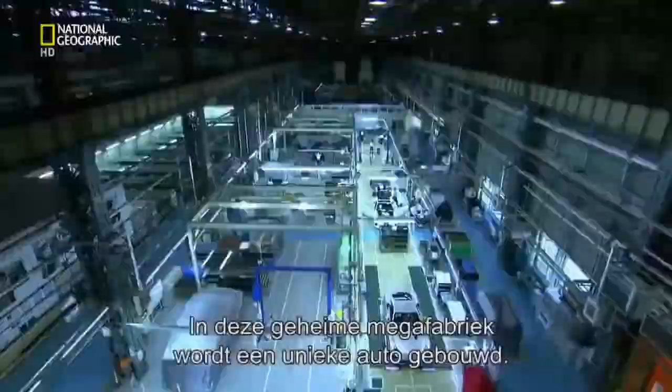Inside this top-secret mega factory, a car like no other is taking shape. Craftsmen hand-build what they consider an automotive work of art.

Money is no object. This machine must redefine a billion-dollar brand. Failure is not an option.

Japanese marque Lexus sells itself on luxury, marketing its cars as elegant, quiet, high-tech, and efficient. Now, a different kind of car wears the Lexus badge: the LFA.

Aggressive, loud, agile, with the highest revving V10 engine in a production car, capable of 325 kilometers per hour. A car like nothing Lexus has ever produced before.

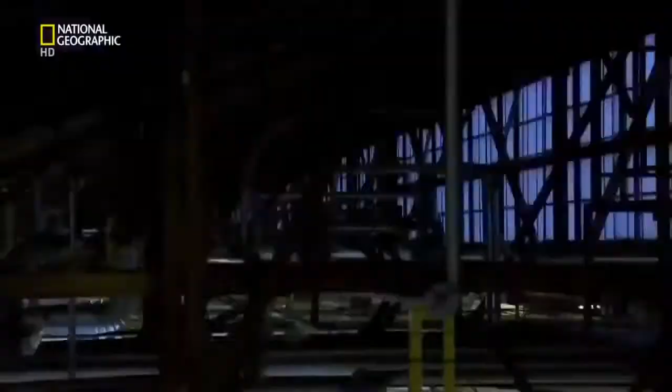Chief Engineer Tanahashi is stepping into the unknown. He must build a car, a team, and a factory from scratch. Basically, we proceeded at my discretion, and where there weren't any rails, I laid them down.

Finding a factory in Japan isn't hard when you're part of the country's largest company. Toyota is so big, they even have their own city, Toyota City.

Of the company's 15 Japanese factories, 10 are found in the city or close by. Among them, the Motomachi assembly plant.

The company transformed two unassuming blocks of this megafactory to create the LFA. They then scoured Toyota's 50,000-strong Japanese workforce to handpick just 175.

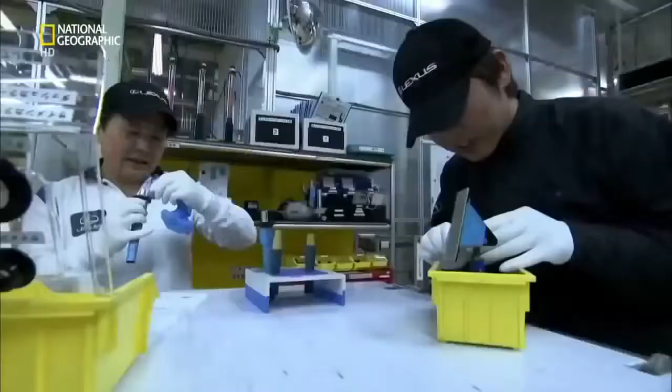All the associates here at the LFA Works feel they are artisans, not just operators. These artisans are known as takumi, Japanese for craftsmen, a status only conferred on the most highly trained, skilled workers.

Each and every associate at the LFA Works is seeking to achieve perfection, taking this challenge on with a sort of samurai spirit.

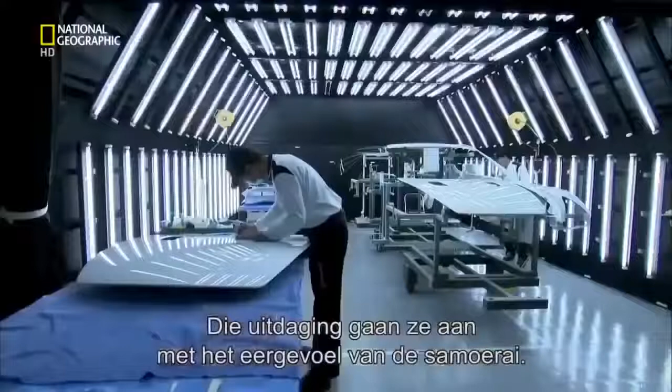Yamanaka Shigeru is manager of the LFA Works. His teamwork credentials come from another time-honored Japanese tradition: baseball.

Before this, I was working as manager of the Toyota Motor Corporation baseball team, which brought people together from lots of different backgrounds. It was because I could manage that organization that I've been made manager here.

To reach their goal, the tight-knit team utilizes sophisticated tools and materials to build the car. The most important of these is carbon fiber composite. Carbon is crucial to the car's performance.

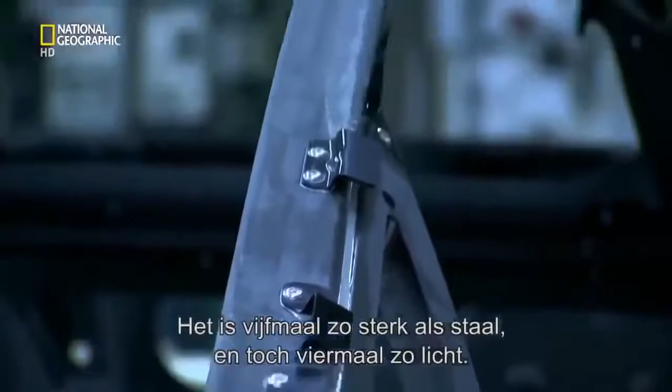It's a material five times the strength of steel, yet a quarter the weight. It's the construction material of choice for both Formula One racing cars and the aerospace industry.

The company even makes their own carbon fiber here on site. Up until now, no television cameras have ever been allowed inside this top-secret facility.

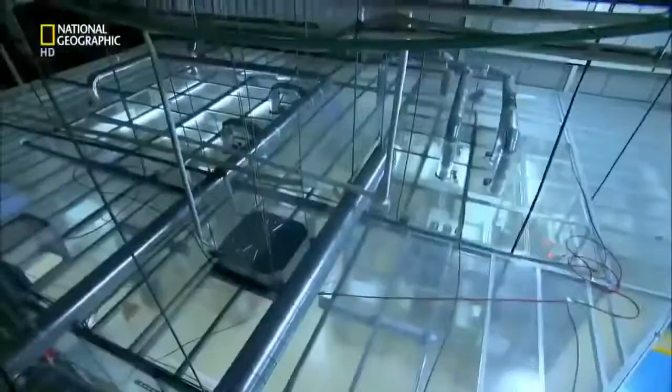First, simple strands of carbon fiber are woven into a pliable cloth using an automated weaving machine. This fabric is then transformed through heat, pressure, epoxy resin, and labor-intensive techniques into the car's core, known as the tub.

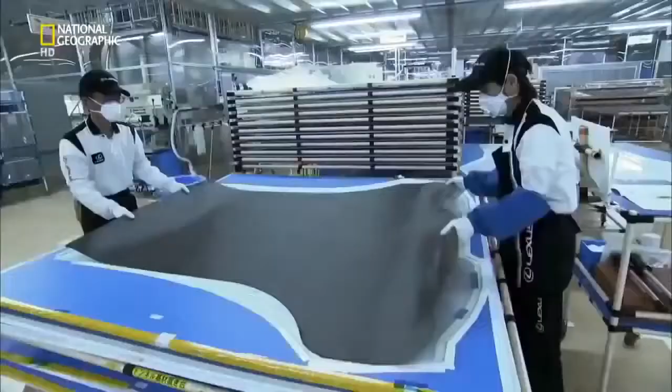The tub is pieced together like a 3D jigsaw. It starts with the construction of the floor. To make it, precisely cut carbon fiber cloth is lifted onto a mold.

Next, skilled Takumi smooth the supple fabric over the mold. This one is for the transmission tunnel that will house the drive shaft and exhaust.

In very complex areas like this, the fabric inevitably becomes frayed and not very neat. The associates work with these areas as if working with silk, taking great care every day. They also wear masks to avoid breathing in the hazardous fibers.

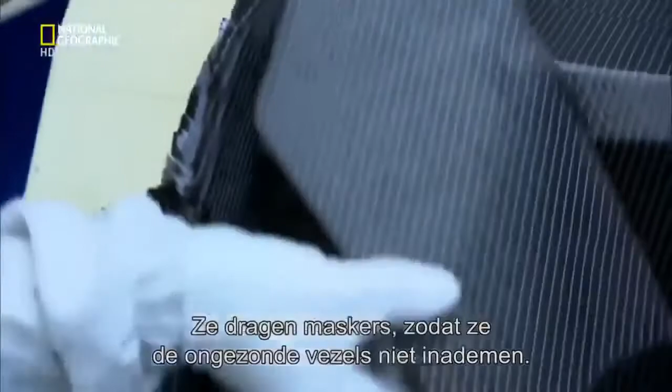In the beginning, the associates found it very difficult to work this material. It was much easier when they used an iron.

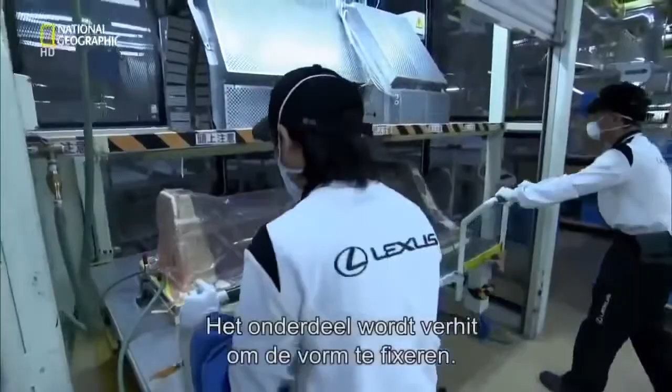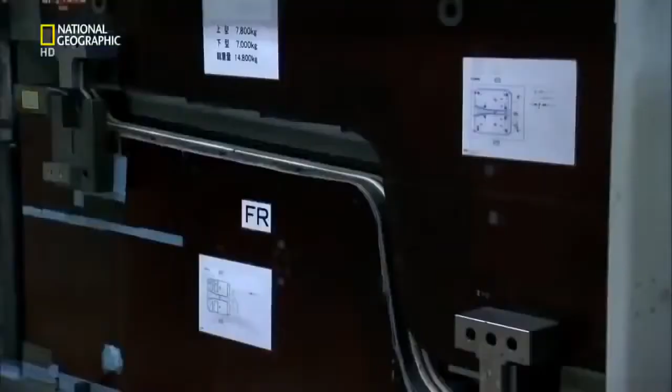A glue-like resin is pumped into the template, and the whole section is then baked for 8 hours at 130 degrees Celsius. Under this pressure and heat, the resin sets hard, binding the individual parts together to produce the car's floor panel.

Back in 2000, the concept of a world-beating supercar only exists in one man's head. At the company, I talked to just a small group of people at the top, not expecting anything, and they said, go ahead and try.

With permission to proceed, Tanahashi gathers a team of engineers around him, and they start to make the basic engineering decisions. In the beginning, we planned to make the body from aluminium.

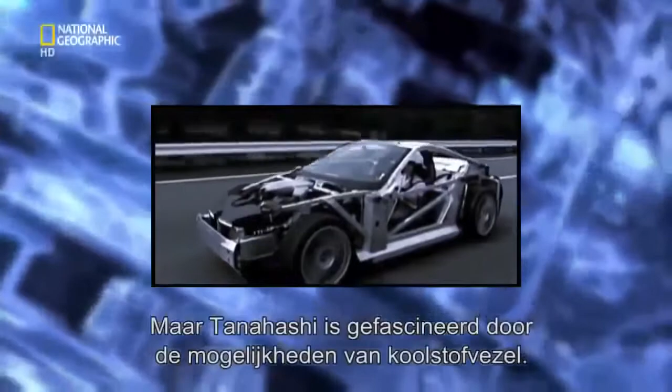But Tanahashi is fascinated with the possibilities offered by carbon. Developing a supercar, a super sports car, carbon fiber was a material I really wanted to try using, if at all possible. But this wonder material has its drawbacks. It's expensive, and the company has never used it to build any of their cars before.

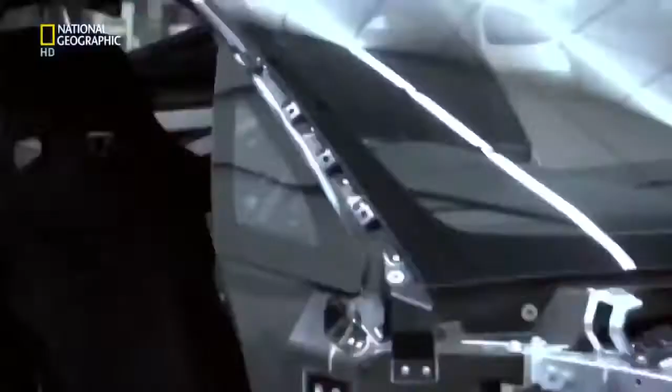Despite these significant challenges, Tanahashi gets his way. In 2005, my boss said, why not go for carbon? Slapping me on the shoulder. And I made the decision to go for carbon then.

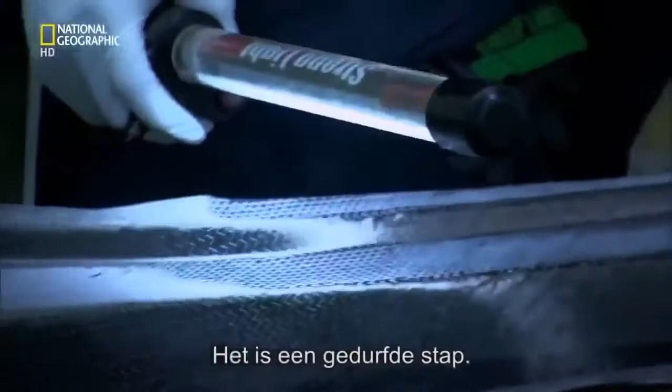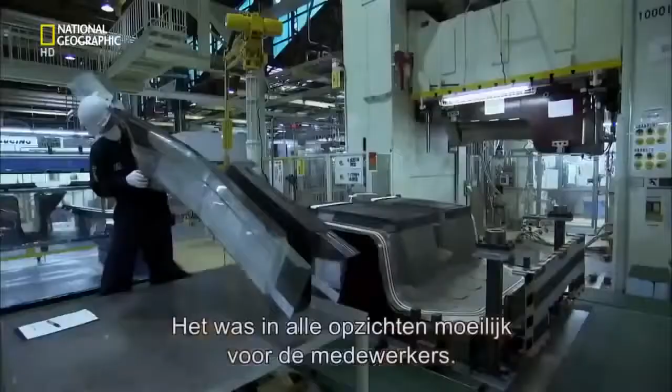It's a bold step. Everyone involved with this project must master a material they have no experience with at all. It was the first time the workers had touched carbon, and everything about it was difficult for the workers.

In the state-of-the-art carbon fiber facility, the Takumi are returning from lunch. They vacuum themselves down to remove any foreign particles before entering a highly confidential sealed room. Here, the majority of the tub's central frame is created using the most intricate techniques.

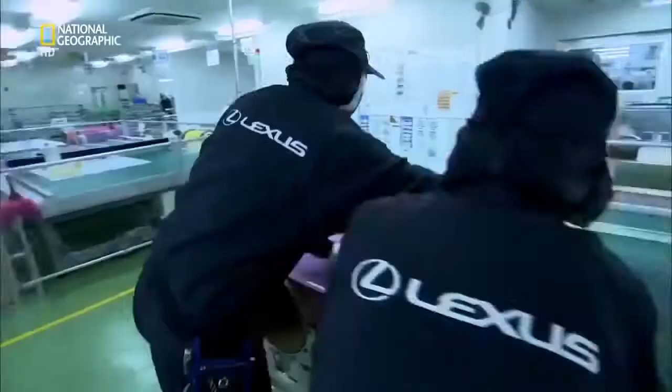In this process, an automated laser cuts out hundreds of individual shapes from carbon fiber cloth that's been pre-impregnated with a sticky resin. Next, Takumi layer the cutouts, up to 20 sheets deep, onto a mold. This one will make the right side panel.

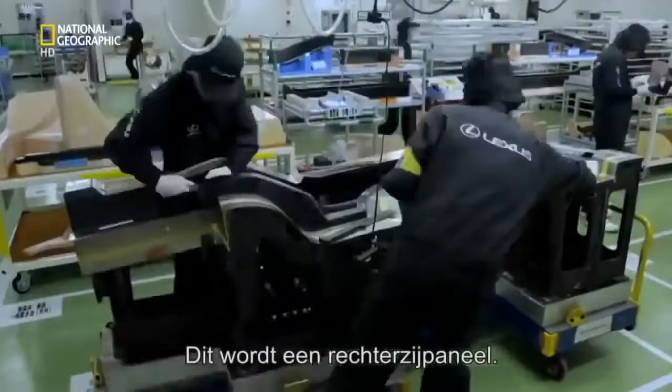The associate uses a dryer to raise the temperature of the laminate and half melts the resin as he applies it. The tacky cutouts stick to each other and any gaps are squeezed out using a vacuum bag that forces them together.

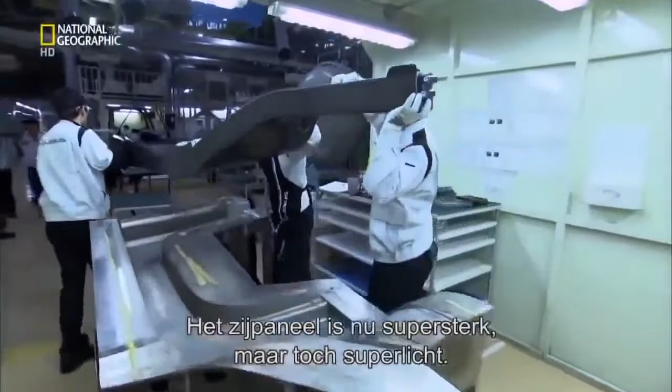The shrink-wrapped side panel is then wheeled across the works and loaded into a pressurized oven. Baking overnight at 150 degrees Celsius sets the resin, resulting in a side panel that's both ultra-strong and ultra-light. An aluminium equivalent would be twice as heavy.

Weight saving is the holy grail for all auto engineers. Less weight and more power leads to increased acceleration, and speed defines a supercar. The body of the LFA is 65% carbon fiber, helping it accelerate from 0 to 100 kilometers per hour in 3.7 seconds.

If made of aluminium, it will be 100 kilograms heavier, like having a sumo wrestler in the passenger seat. As it is, this car weighs just 1,400 kilograms all in.

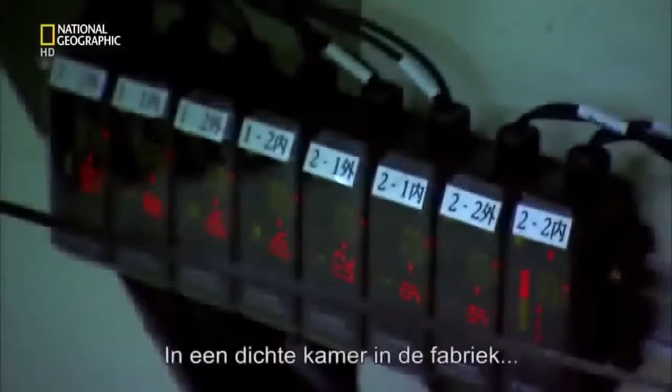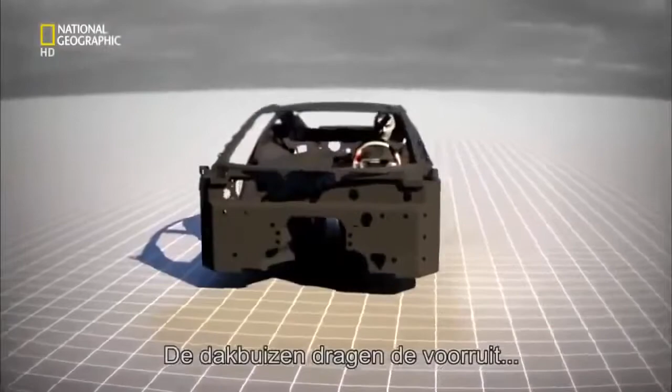Back at the factory, in a locked room, a bespoke machine creates two crucial parts to complete the tub's construction. The roof rails support the windscreen, as well as protecting the driver if the car rolls over.

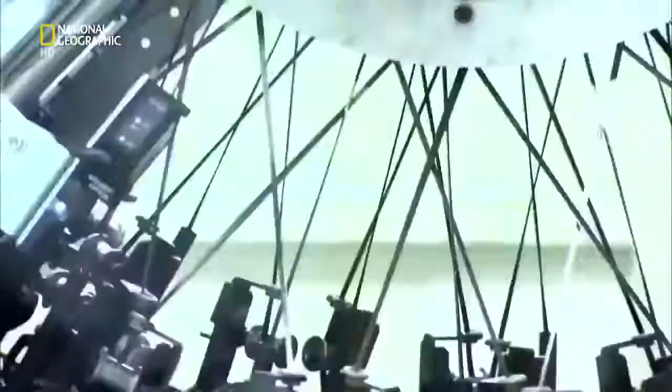This custom-built circular loom weaves the carbon rail in 3D. It uses lasers to control the feed of carbon fiber strands onto 144 bobbins. These knit the carbon around a top-secret automated template that's fed through the center of the loom. This is done twice over to cross-hatch the carbon weave, so giving the rail its strength.

The whole mechanism has its own control box, and for good reason. If something goes wrong, even a little thing, the shape gets distorted immediately.

The drivetrain comprises the transmission, torque tube, and last but not least, a 4.8-litre V10. The location of this engine is crucial to the car's entire concept. I wanted to build the car around the people in it. And for a supercar that puts people first, the optimum place for the engine is front mid.

This front mid location puts the engine between the driver and the car's front wheels. With the transmission placed at the rear, the driver is in the center and the car feels balanced to drive. The aim is to make the car's handling as good as possible.

But a front mid configuration dramatically restricts the space available for the engine. Tanahashi has a problem. You need an engine of a certain size with a certain degree of compactness, but you want a high-powered engine as well.

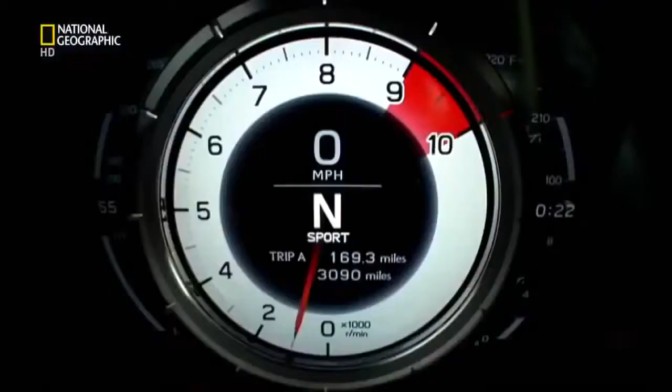Tanahashi needs a small engine to fit in the restricted engine space, but he also needs the power of a large engine because power equals speed.

And that isn't all. The high-pitched sound of Formula One makes you shiver, doesn't it? I really wanted to have that as part of the LFA.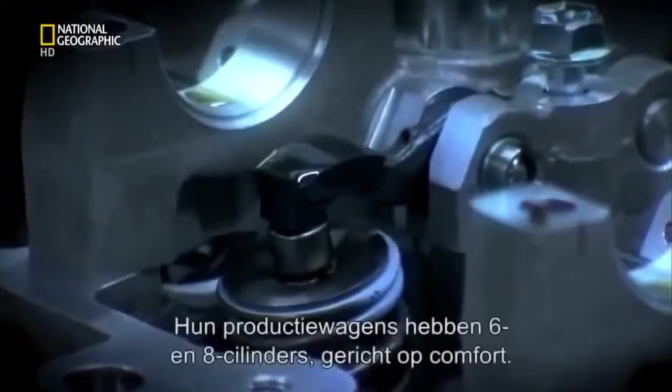Only a high-revving V10 engine supplies this combination of power and sound, but a traditional V10 is too big for his mid-front configuration. Lexus have made nothing like this before. Their production line cars use 6- and 8-cylinder engines engineered for a super quiet ride. This V10 will be the opposite.

Tanahashi turns to some old friends for help. We are a motorcycle manufacturer. We understand power alone is not enough in a vehicle. For a sports car, small and lightweight is critical.

For almost half a century, Yamaha have worked with Toyota to create high-powered, lightweight engines and cars. The legendary 2000 GT, star of the James Bond film You Only Live Twice, and Japan's first true sports car, was the first fruit of their collaboration.

Headed by Lexus engine guru Okamoto Takamitsu, the team sets itself an ambitious goal: to create a naturally aspirated V10 engine as compact as a traditional Lexus V8, with the weight of a V6.

I wanted to create something different to any other supercar engine.

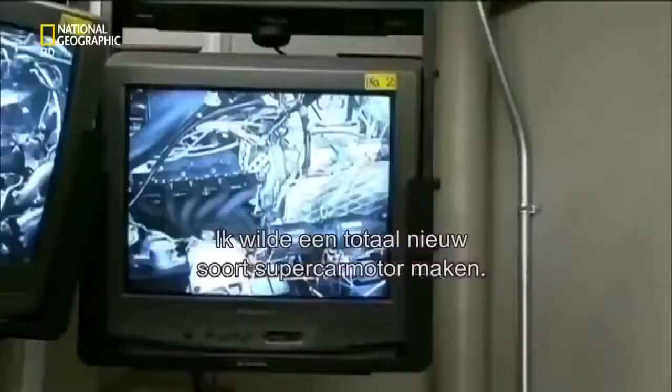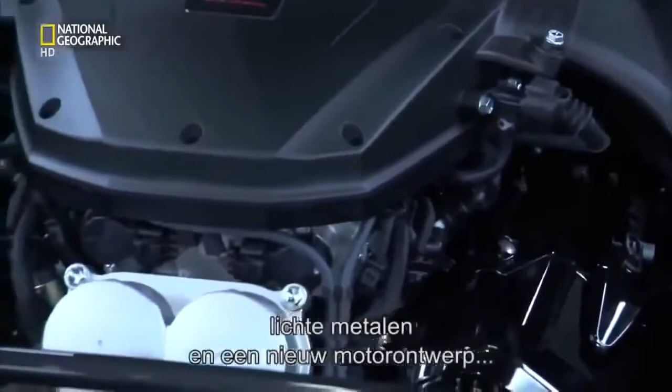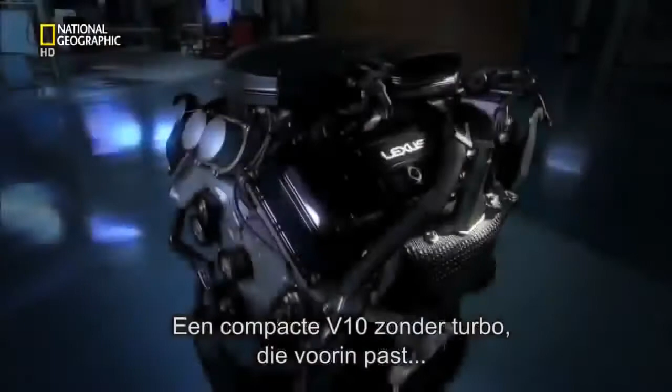Normally, engineers use turbochargers to boost the output of smaller engines to simulate V10 power. But turbocharged engines don't have the rapid response, acceleration or sound of a naturally aspirated V10. By using Yamaha's motorcycle know-how, the lightest metals, and redesigning the engine's guts, Okamoto creates a masterpiece of engineering: a non-turbocharged compact V10 that fits into a mid-front design while keeping weight to a minimum.

The engine starts life in Toyota's Miyoshi plant as molten aluminium. It's cast in a 3D resin-impregnated sand mold made from 37 individual blocks that take a week to fashion.

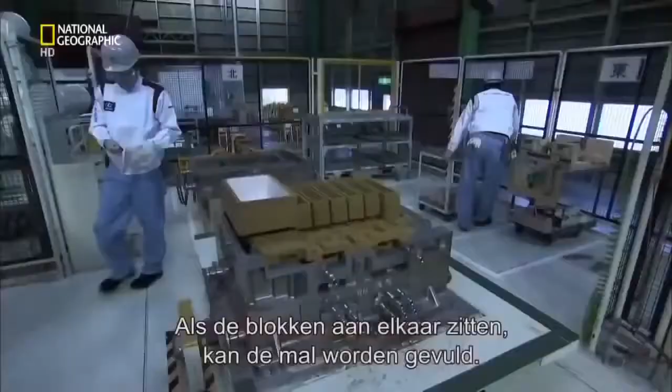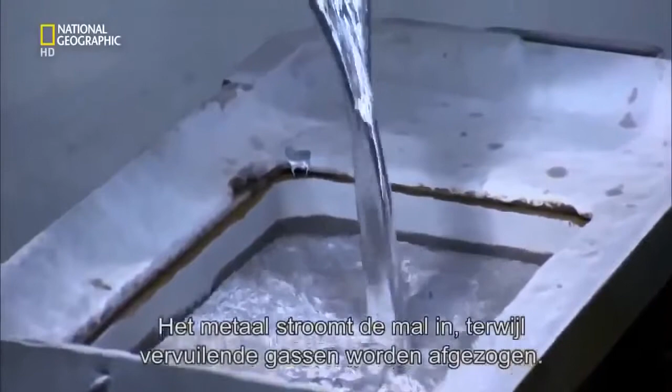With the blocks fitted together, the mold is ready to be filled. At 750 degrees Celsius, impurities are scooped off the top of the molten aluminium. The liquid metal flows into the mold as a vacuum sucks out any contaminating gases.

Two hours later, with the metal set, the sand is hammered off to reveal the solid aluminium engine block inside. It's off to Toyota City's Honsha factory and the company's highly confidential Formula One engine facility.

These works are always off limits. We're going to go in. Are you ready? Come in. Television cameras have never been allowed in here before.

For a decade, Toyota spent big competing in Formula One racing. But without a win in 139 races, they withdrew in 2009, leaving this state-of-the-art facility idle. For the LFA team, it was too good an opportunity to miss. The close parallels with F1 engine technology make this milling facility a ready-made fit.

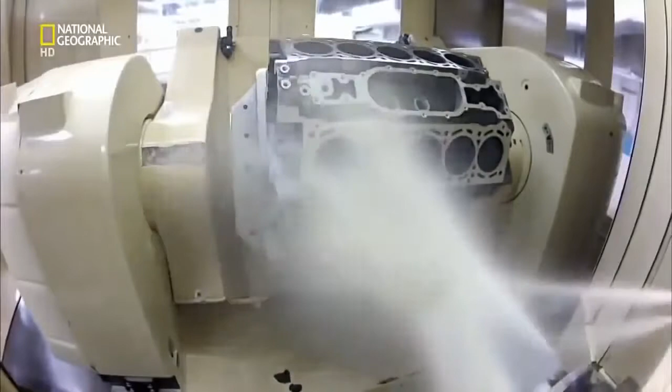In these million-dollar automated machining tools, the rough engine casts are milled, drilled and polished before emerging as precisely spec'd engine blocks.

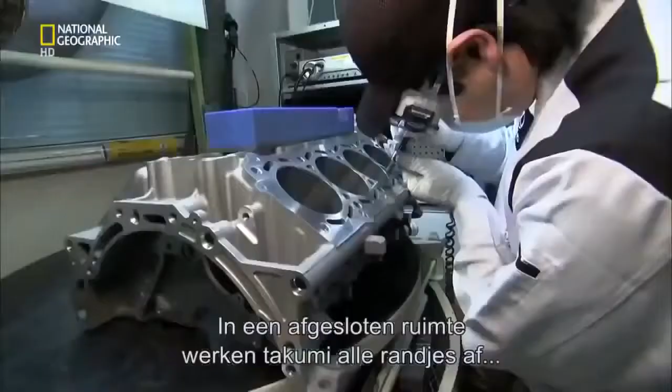Then the robots hand over to humans. In a sealed room, Takumi hone every sharp edge using precision polishing tools. Finally, a highly skilled Takumi pre-assembles the finished engine blocks to check they fit precisely. These blocks and heads are paired for life.

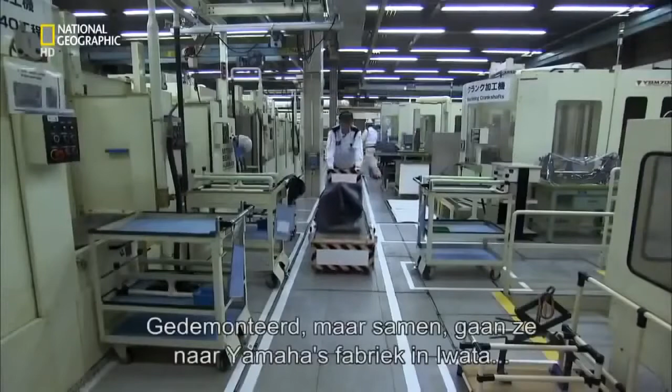Disassembled, they travel as a unit to Yamaha's Iwata City plant, 90 kilometers southeast of Toyota City. The engine room here takes obsession to new heights.

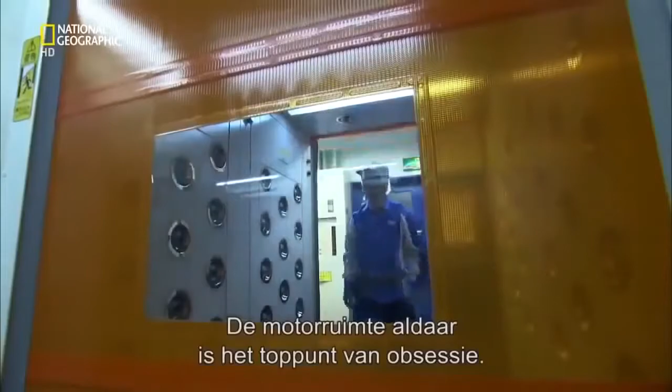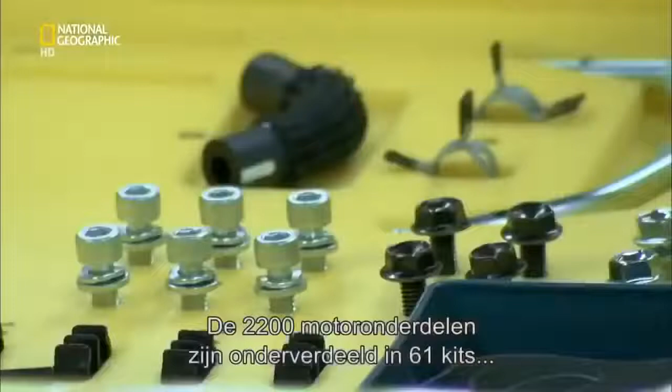As you'd expect, hairnets and airlocks prevent any particle contamination. But the room is also kept at a constant temperature and humidity to ensure that every engine part is at the same state of thermal expansion during assembly. This is more laboratory than workshop. The 2,200 engine parts are divided into 61 different kits for assembly by number.

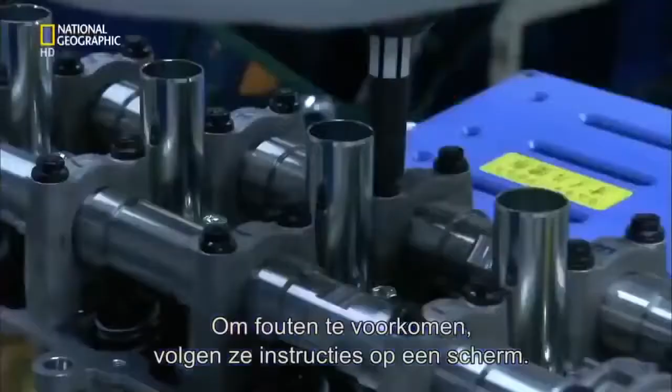Each hand-assembled engine bears the Takumi signature.

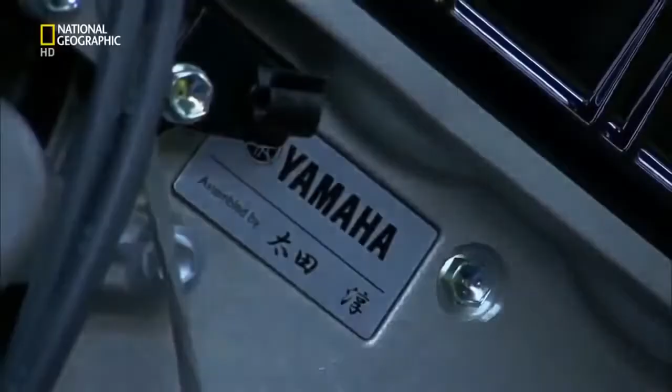Before this masterpiece goes anywhere near a car, it undergoes a half-day of exhaustive testing in the room next door to engine assembly. The resulting 4.8-litre engine is so responsive that it takes just six tenths of a second to reach 9,000 RPM.

That means instant acceleration, whatever gear you're in. This engine has excellent response and more RPM than any other commercially available engine. Response time is so fast that a digital rev counter is the only unit able to keep up.

And the sound of this high-revving engine is unmistakable. The sound of the LFA is unique, and once heard, never forgotten.

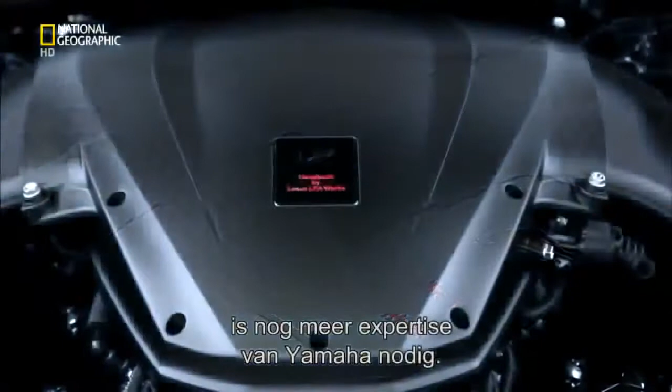To achieve the engine soundtrack that Tanahashi insists upon requires more of Yamaha's specialist knowledge. We are a manufacturer of musical instruments, so when it comes to sound technology, we have a certain level of know-how.

Honji Yoshikazu is obsessed with sound. I think the relationship between a super sports car and its driver is like the relationship between a top musical performer and their instrument. When they play in a certain way, they can listen to that sound and use it to produce another, better sound.

Critically, a car has two different sound characteristics. One sound is the exhaust. You can call it an iconic sound. Just by hearing that sound, you know which car it is. The other, which we were particularly concerned with, is the sound heard by the driver.

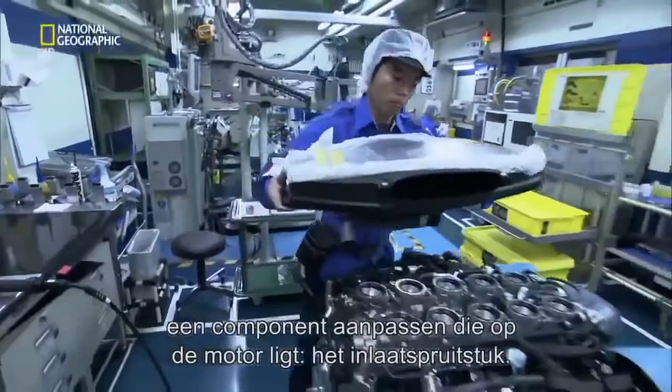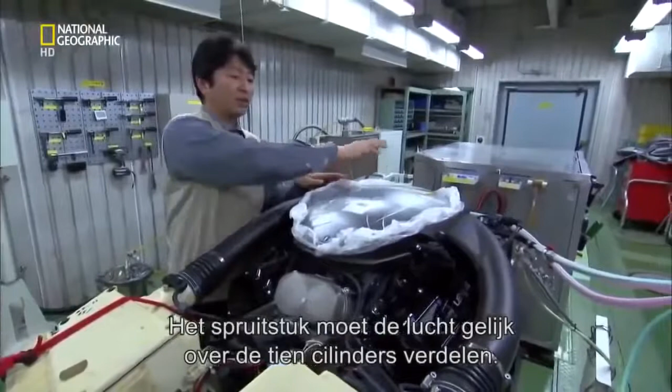To refine the driver's soundtrack, Heiji Maruyama, general manager of Yamaha Motors, had to redesign the component that sits on top of the engine, called the surge tank, by turning convention on its head. The function of the surge tank is to send air equally into all 10 cylinders. Normally, techniques to reduce noise from the intakes are used. We thought to go the other way and use it to amplify the sound, to communicate it to the driver.

Maruyama tunes the chamber by varying the thickness of the surge tank's upper surface and adding internal vibrating ribs. The construction is very like that of an acoustic guitar or violin. The team channels these good vibrations back into the cabin using sound passages.

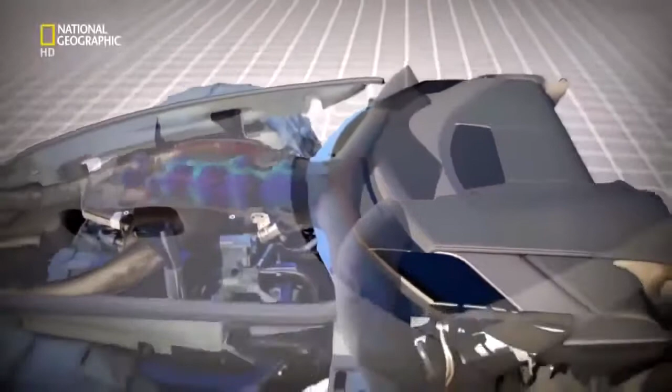We use these to send low-pitch sound to the driver's feet and higher frequency sounds through at ear level. The driver is in the middle of this dynamic surround sound system.

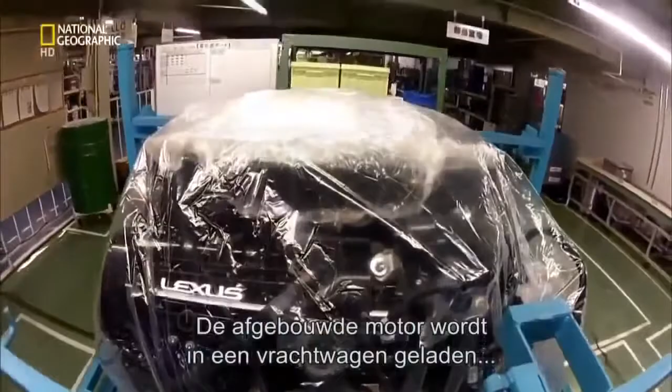The completed engine is forklifted onto a waiting truck for shipment back to the LFA works. Here, as part of the assembled drivetrain, it's inserted into the cabin's belly, guided only by eye.

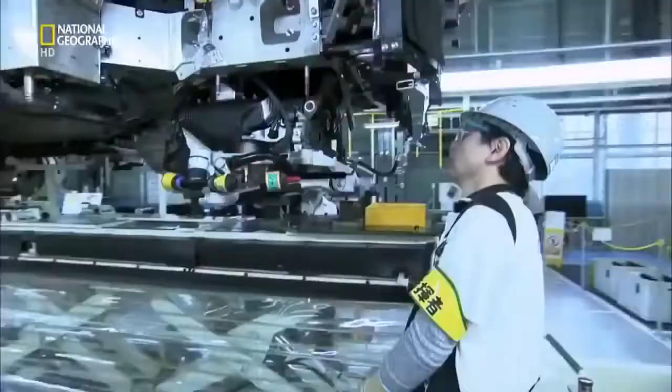With the guts of the car in place, it's time to feed them. An automated pump injects engine oil, brake fluid and coolant into the appropriate underbonnet opening.

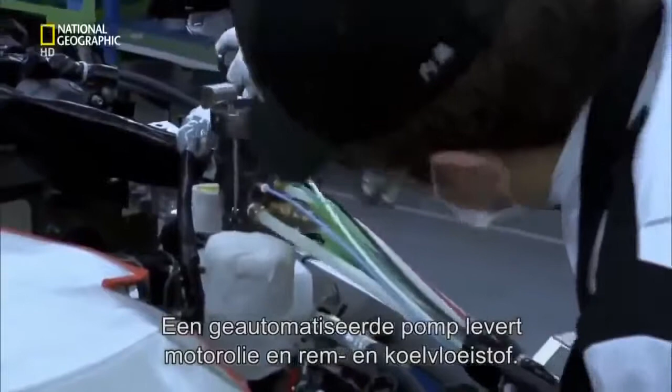In Japan, machines play a tune to alert anybody nearby that they're running. This one plays an American folk song. With the precise volume of fluid added, the pump stops, as does the music.

The car's 9 moulded glass fibre body panels are manufactured off-site. This material is both strong and light, but far cheaper to replace than carbon fibre, should the car crash.

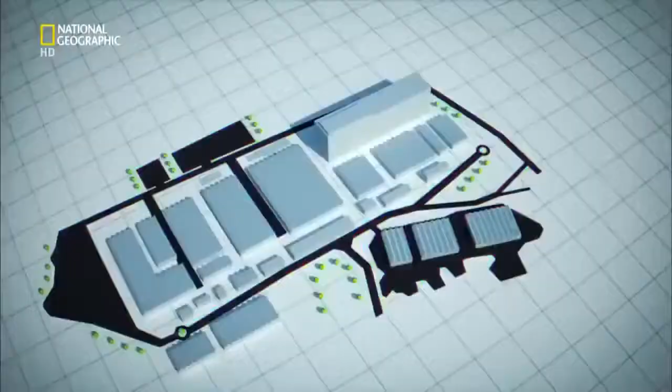The paint shop is under the same roof as assembly, but it's a very different world in here. At the LFA works, paint is one of the few production processes performed by robot. The company believes they give a more consistent finish.

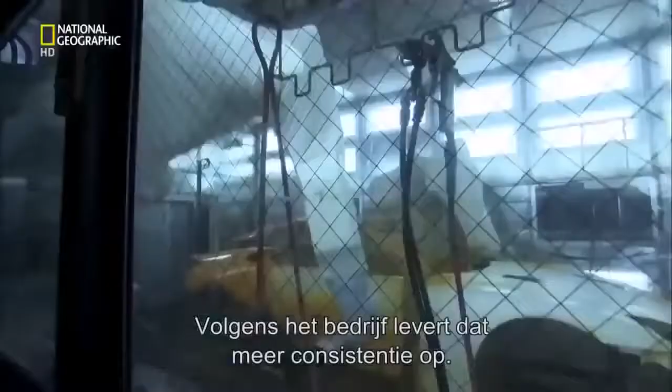But there's always an ongoing human battle in the paint department. Dust is the greatest enemy for painting. If dust gets into the paint surface, when it's heated, the dust swells up and causes a blister. So the atmosphere is controlled on a daily basis, and there's a strict dress code.

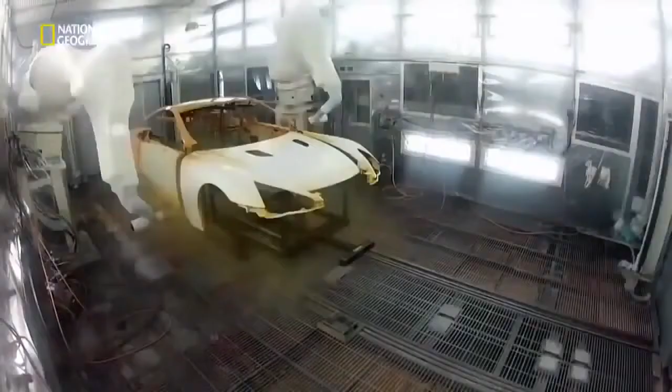Up to 5 layers of paint are applied. And where robots can't reach, humans can.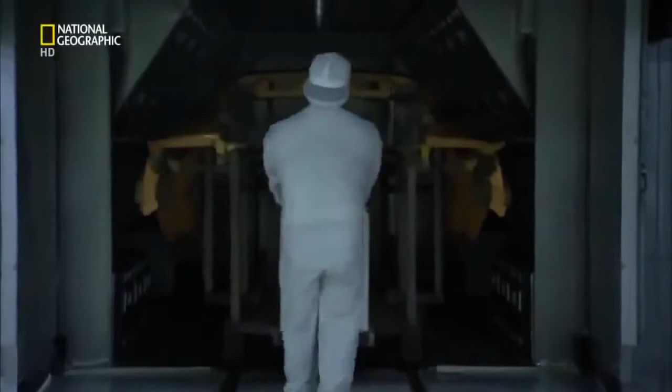Job done. The sprayed panels are dried in an oven at 100 degrees Celsius for 50 minutes before being wheeled out for inspection. The battle against dust continues with water nozzles spraying a fine mist into the air to stop anything drifting onto the pristine surfaces.

A bright light inspector spots any blemishes and marks them up to be polished out.

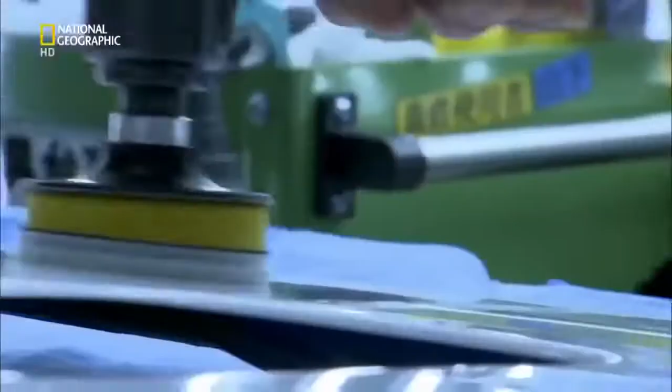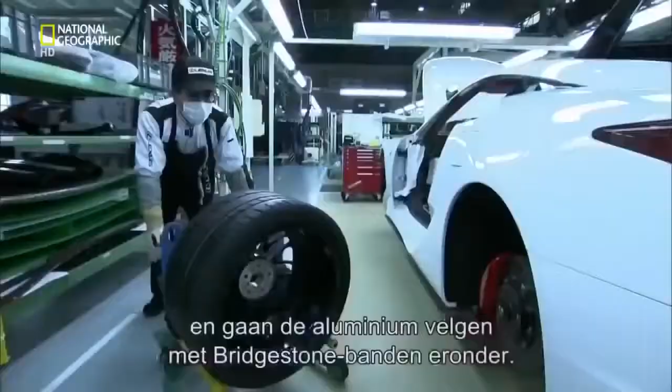The completed panels are wheeled out of paint across the factory floor and attached to the carbon tub back in assembly at the third position on the line, known as final. Here, the hand-stitched leather interior is installed, and the forged aluminium wheels with bespoke Bridgestone tyres are also fitted.

It looks as if the associates are performing each task very slowly, but every one of them is working very carefully and with a high degree of certainty. If you compare it to a sport, they are top players who complete a successful play every time.

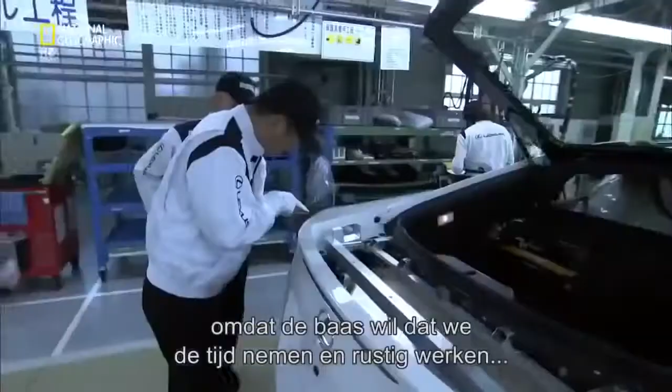The LFA works runs like clockwork, yet there's no clock watching. The reason why there is so much time is that Chief Yamanaka tells us to take our time and work slowly so that we can make something that we know is good. How can I put it? He says that in order to ensure quality, we can take as much time as we need.

That goes for overtime as well. If it means we make something good, then we can do overtime.

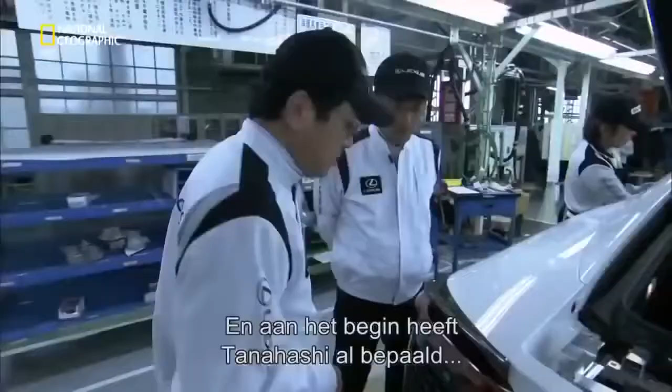The only stipulation is that one car must drive off this assembly line every day. And from the beginning, Chief Engineer Tanahashi was clear that only 500 would be built. At a car a day, that will take just 2 years. And then, this factory will close.

Making only 500 cars positions the LFA as a very special car. There is no plan to make any more at all.

Even pricing the LFA at $375,000, the most expensive Japanese road car ever, a limited production run isn't going to recoup the costs of development, the use of cutting-edge materials, and unlimited overtime.

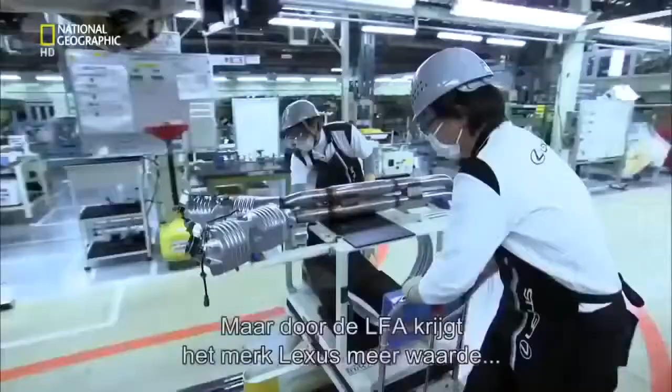I think it will be difficult to make a profit with only 500 units delivered. But by producing the LFA, the Lexus brand gains in value and is well received worldwide.

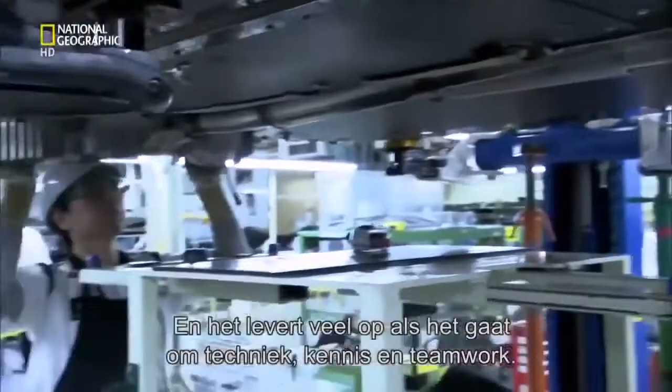I think the legacy will be left in technique, knowledge and teamwork for making cars that will please our customers in the future.

Back in 2004, with the prototype built, Chief Engineer Tanahashi takes a bold decision. He wants the car proved on the severest of tracks. Nothing in Japan fits the bill, so he takes the entire development team to the notorious Nürburgring in Germany.

For us car makers, the Nordschleife on the Nürburgring is like a mecca for cars. This is where this car was honed.

The 20-kilometer Nordschleife section of the Nürburgring is infamous as the world's most punishing test track. For 4 years, the team tests every aspect of the car's engineering around the Nordschleife's dips, jumps, relentless corners, and flat-out straights.

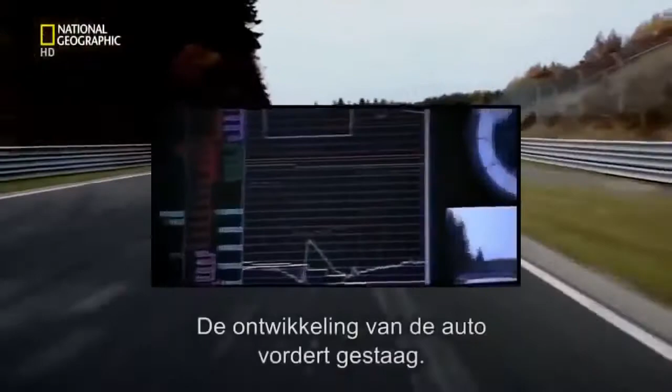The car's development makes progress towards its production deadline, but Tanahashi wants to fast-track its fine-tuning. In 2008, he throws it into the unforgiving world of racing and enters the Nürburgring 24-hour race. It was purely to get more feedback on the production type LFA and to improve it under real race conditions.

The brutal experiment works. A year later, the revised car wins its class. Tanahashi is finally happy, and in 2010, the LFA goes into full production. And in 2011, a special race edition of the standard LFA is launched.

Its name pays homage to the racetrack that forged it. It is with thanks to that sacred place that we called it the Nürburgring package.

This Nürburgring package has a retuned engine which pumps out 571 horsepower, 11 more than the standard engine. This extra power requires more downforce to keep the car on the track, so the rear spoiler is larger and fixed.

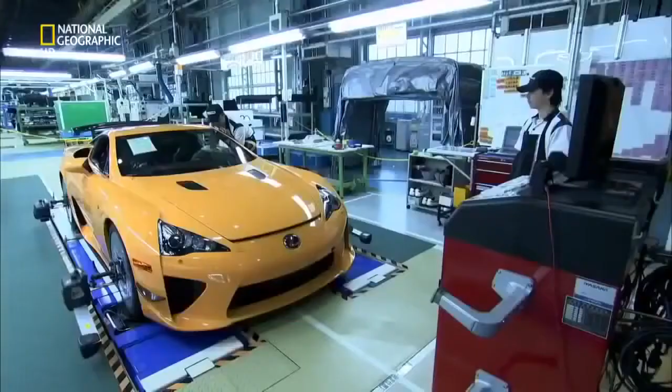Back at the LFA works, in assembly's last position, the wheels are aligned to ensure the car handles perfectly. After 3 days in assembly, the car officially moves to inspection.

The inspection process involves 7,000 separate checks. Hayashi Katsumi does the first of 1,482 of these under lights.

Right now, I'm inspecting the paint surface. I'm using my hands to feel for any uneven areas in the bodywork.

You have to touch it gently, like I'd touch a woman. I've been doing this job for 30 years. If I didn't have my wife, then it would certainly be my lover.

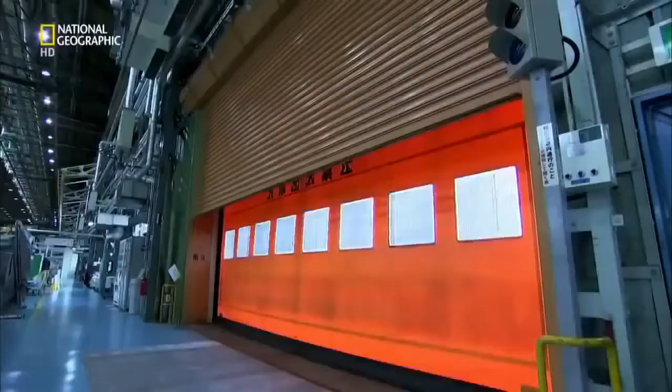With the internal and external surface inspection signed off, the car leaves the LFA works for good. It's driven through the Motomachi plant into quality control. This will be its home for the next 7 days.

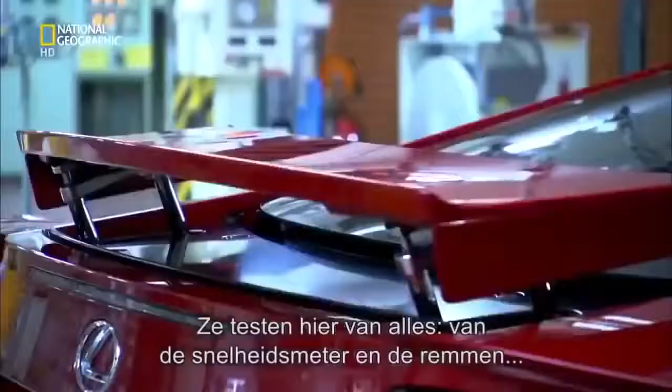The checks performed here range from speedometer and brake tests to water tightness. The reports fill a 350-page booklet.

Finally, test driver Amano Nobuaki ensures each of these cars is road ready when it leaves the factory. The car is bedded in on Motomachi's very own test track.

The masked sections of the bodywork are to protect vulnerable areas from stone chips. I think this is the best possible job in the world.

Amano checks the car's controllability, engine sound, power, braking performance, and vibration noise on the 1 kilometer track.

There is one danger driving this car every day. Every now and again, I just want to forget the job and drive this car away somewhere to have for myself.

This car is complete and ready for its owner. To date, all 500 LFAs are spoken for. No more will be sold.

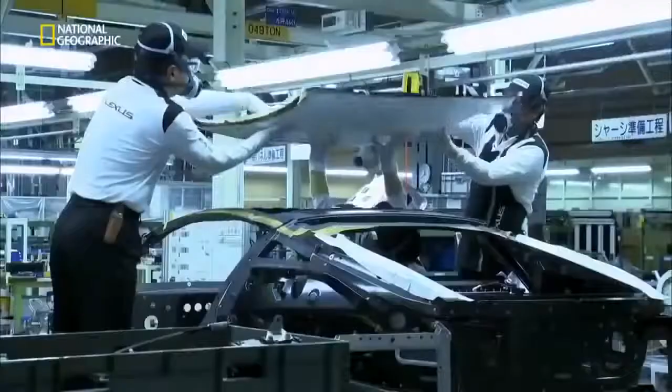And this mega factory could redefine how all Lexus cars are built. We took on all kinds of challenges, and there were new production needs. I look forward to seeing the outcome of these, both visible and invisible, in future cars.